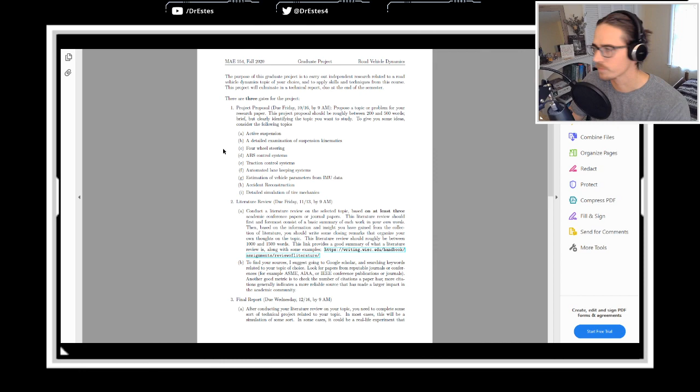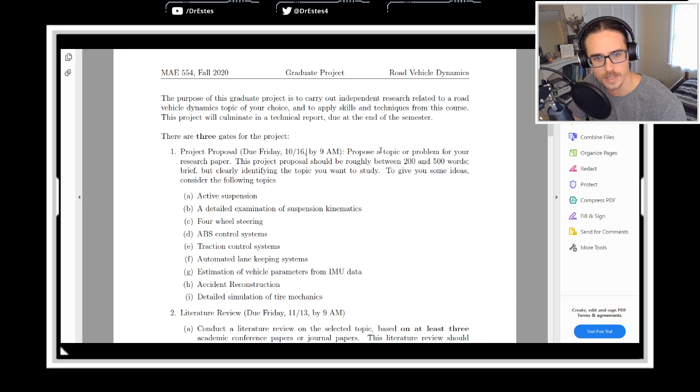For those of you who are graduate students, I did post a description of the graduate project, and this is what Chin was talking about. The first thing you need to do by Friday, October 16th, is give me a topic that you want to do. I listed a bunch of stuff here, but you don't have to pick one of these. This is just to give you an idea of the type of stuff that's out there that I think is interesting or that people have looked at before.

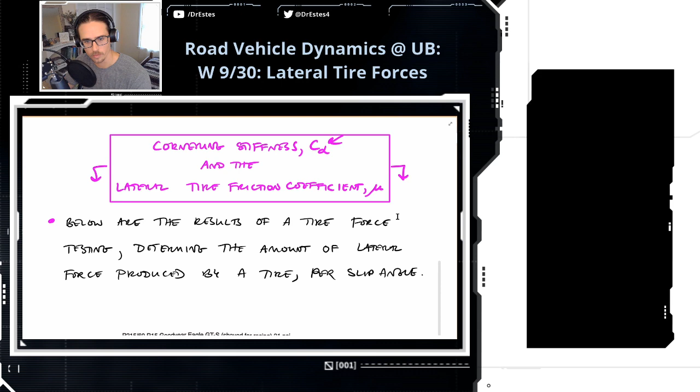Okay, let's find this thing. Alright, okay, I gotta fix this. We're looking at cornering stiffness, and okay, let's just leave it at there, because that's an important one. Okay.

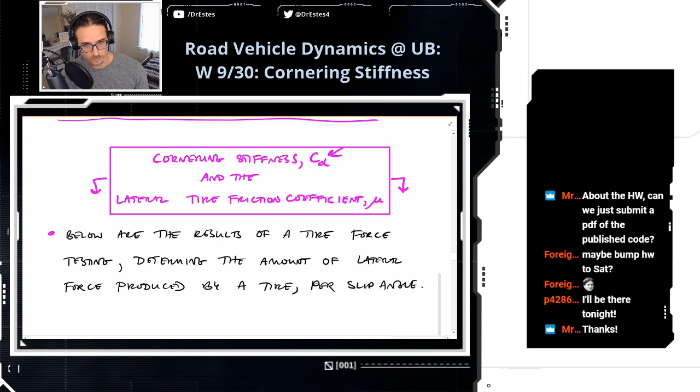Okay, ooh, finished, very nice. Yeah, once you get going, I think this homework is pretty reasonable. It's a cool result, you get to see how this car performs over the quarter mile. And it's decently close to the real performance of the car. If you look up quarter mile times for a ZR1, it's going to be pretty close to what you get. You have the power.

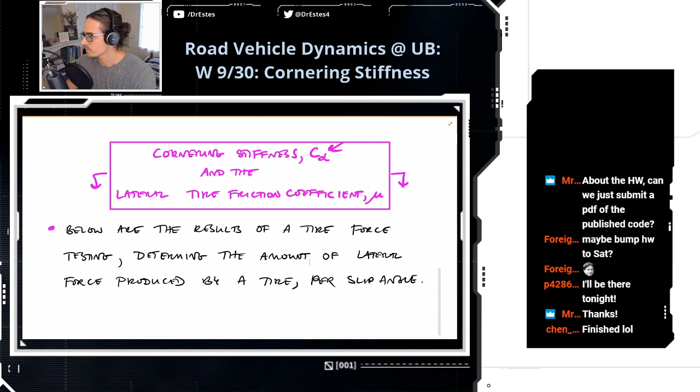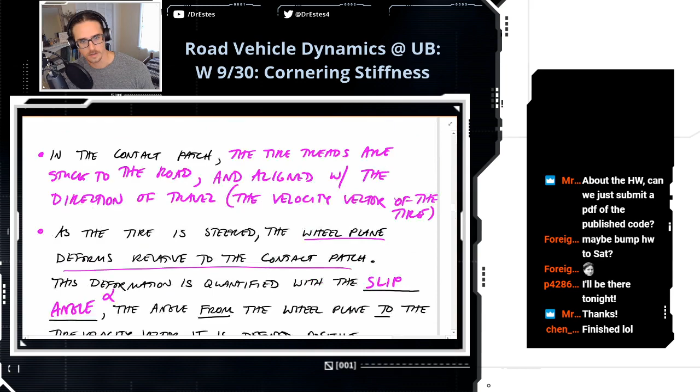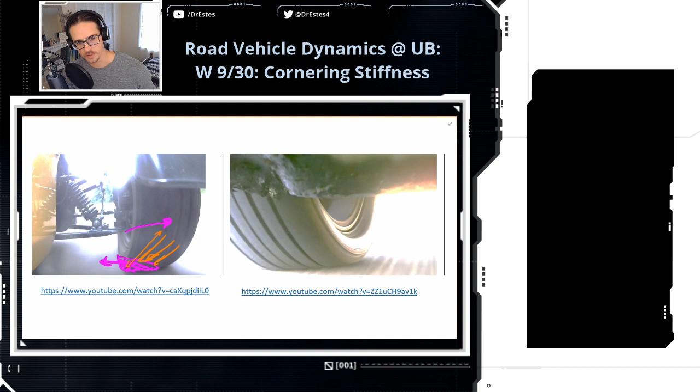But the contact patch is stuck to the ground, so the car is kind of pulling this way just because of its inertial force. And that stretches the tire relative to this contact patch. But the tire acts like a spring, and it's trying to pull the car back this way. And that's like the basic intuition about how tire forces are being generated. The tire's stuck to the road, and then it stretches and it pulls the whole car towards the contact patch.

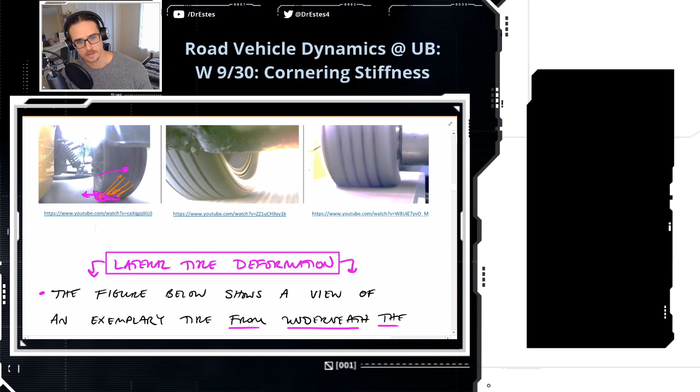We measure this lateral deformation in the tire using a slip angle, which is this angle in here. It's the angle between the wheel plane of the car, of the tire. So think of this tire plane as where the tire's pointing.

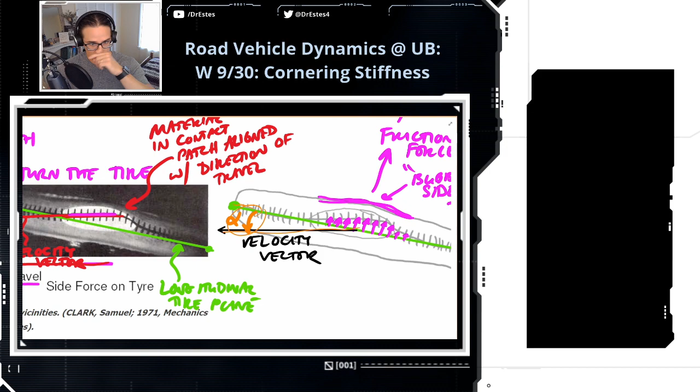But the direction that the tire is actually heading, the velocity vector, there's generally a difference when you're cornering. When you're going straight, the tire plane is lined up with the velocity vector, but most of the time it's interesting in Formula One races or any race when you've got crazy corners and whatever.

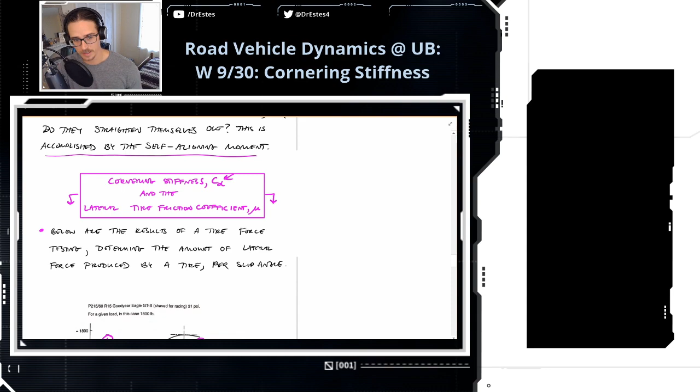So there's going to be a difference there. Today we're going to talk about cornering stiffness and the tire friction coefficient, and it's related to this slip angle. So let's get into it.

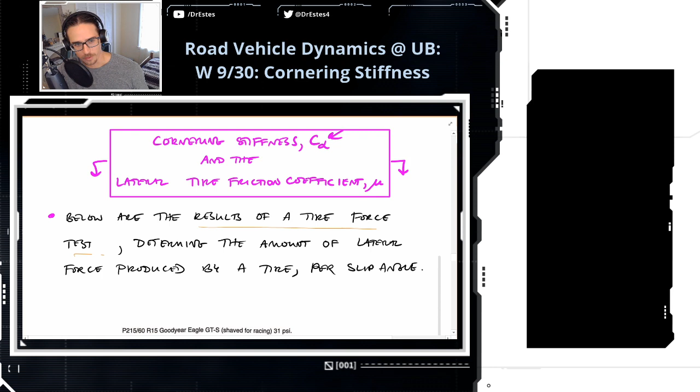Below are the results of a tire force test. This test determines the amount of lateral force produced by a tire per slip angle. So let's talk about what's happening here.

On the horizontal axis of this graph, we have the slip angle, alpha. You can see that the slip angle is increasing this way, going from 1 degree all the way up to 8 degrees. Going back to the picture from before, this is showing an increase in angle between the tire plane and the actual velocity vector of the tire.

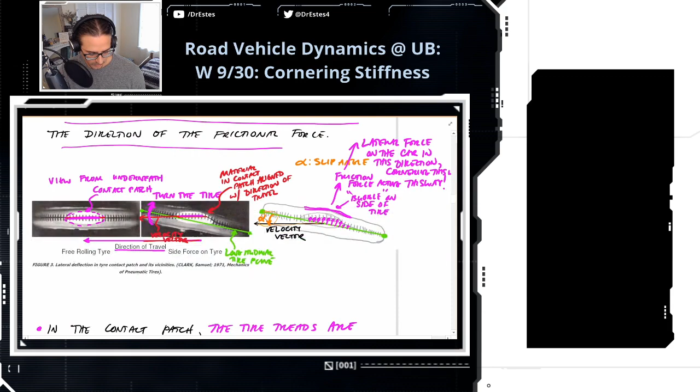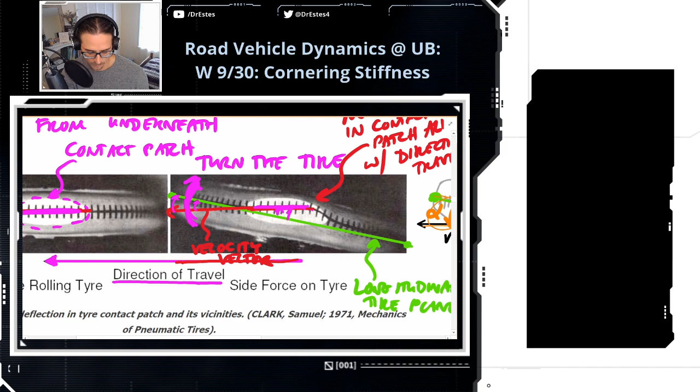Going back to a picture I like, it's kind of like this, where this angle in here, they're increasing it. Basically in the tire contact patch, the tire is getting stretched more and more and more. That's how you interpret the x-axis - the tire is getting stretched in the contact patch more and more, measured with the slip angle. Now, what happens to the lateral force?

We'll refer to lateral force as F sub y. Like longitudinal force, we had F sub x in the x direction, this is going to be in the y direction. This is going to be in pounds, pound force. Notice that these numbers are negative - that's just sign convention, we'll worry more about that later. But I want to point out there's 3 regions of behavior for lateral force that a tire makes.

The first one is the elastic or linear region. We call it the linear region because as the slip angle increases, the lateral force increases linearly. So we can get the slope of this - the slope would be the change in lateral force. The vertical axis is actually plotting negative lateral force, but I'm taking the derivative of that quantity with respect to the slip angle. So that's the slope there.

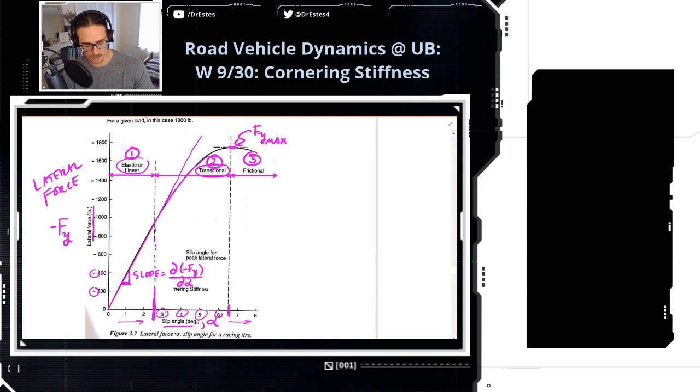Now, if you go beyond this slip angle, the tire starts to produce less lateral force. If this graph continued, it kind of goes down and levels out - it doesn't keep going down, it kind of levels out. What's happening this way is the tire's starting to slide.

But if you're racing and trying to get around a corner as fast as possible, you want to be in the region where you're producing the most lateral force, and that's going to allow you to go faster through a corner. You're playing a gambling game where you're trying to get the slip angle of the tire to around 6 degrees.

It's different for different tires, but if you go beyond that, you're going to start to lose traction. So racing, especially with corners, is balancing on a knife's edge. When you're drifting, at least some of your tires are over here - they're not producing maximum lateral force anymore. They're kind of sliding. So generally, drifting isn't the fastest way around a track because you're not generating the maximum lateral force.

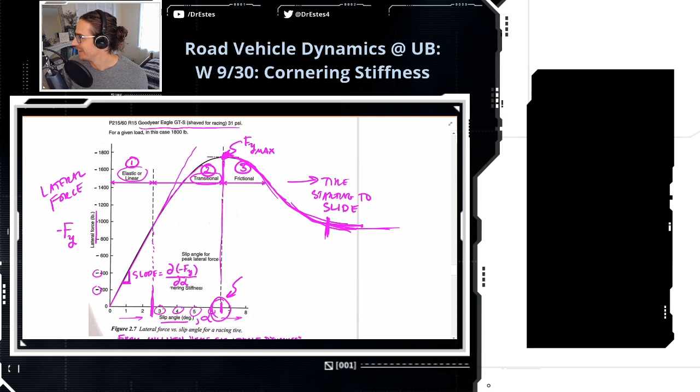I don't know if Gary would argue with me there, but okay.

According to SAE convention, the Society of Automotive Engineers, a positive slip angle creates negative lateral force. That's just the convention. So that's why in this graph I have positive slip angles here with negative lateral force. This will make more sense once we develop the dynamics - you'll see which directions things are pointing and what that means. But for now, just take it that a positive slip angle is going to be negative lateral force.

By the way, lateral force is defined positive to the right hand of the driver. So if you have a positive lateral force, according to SAE convention, that means you're cornering to the right because your tire needs to be producing a force to the right in order to corner to the right. So positive lateral force generally means a right turn, and your tires are going to have a negative slip angle in that case.

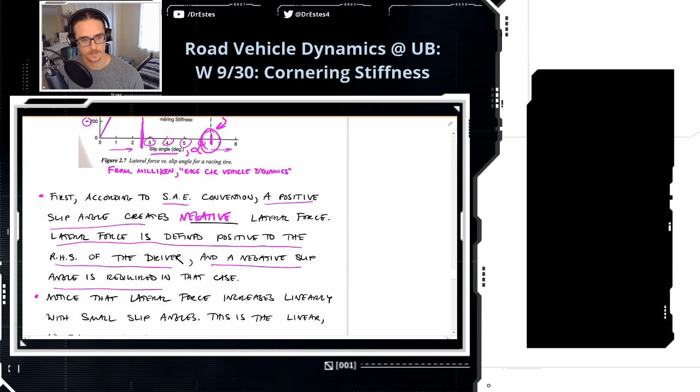From the graph, we notice that lateral force increases linearly when the slip angles are small. What if we meet a sharp corner and have to make the slip angle greater than 8 degrees? Well, hold on to your hat. Put on your seatbelt.

What you can do in a sharp corner is slow down as well. And that happens in Formula One. I forget which famous racetrack it is - Monaco or something, I hope I'm not getting that wrong. But there's this famous hairpin turn. It's super tight, and it's also down this steep grade. You're going down into the turn and then you have to turn really tight.

Yeah, Monaco. And they slow down to what, 20 or 30 miles per hour going through that turn. Because the faster you go through a turn, and the tighter that turn is, the more lateral force your tires have to produce to hold you into that corner. And you notice this when driving around yourself - if you make a turn and you go very fast through it, you really feel yourself thrown around.

So sometimes drifting is hard to... no, you don't have to drift. You could slow down. There's nothing wrong with slowing down into a corner.

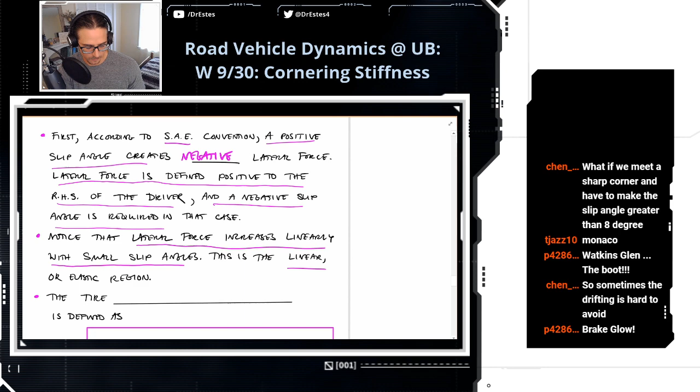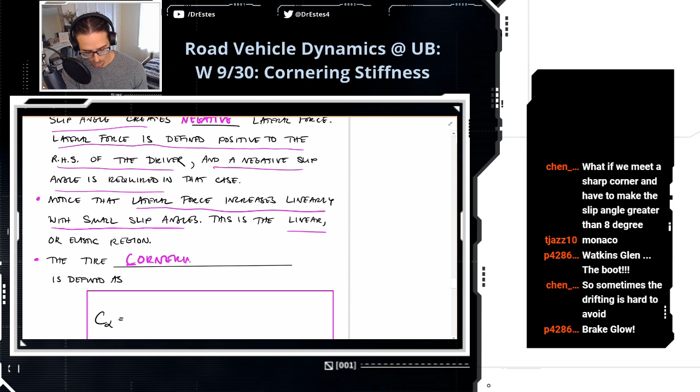Okay, so lateral force increases linearly when the slip angles are small - that's the linear region. And this brings us to the definition of tire cornering stiffness. So the tire cornering stiffness is defined as the slope - this slope in the linear region, we define this as the tire cornering stiffness. So if your tire has more cornering stiffness, it means you get more lateral force per slip angle.

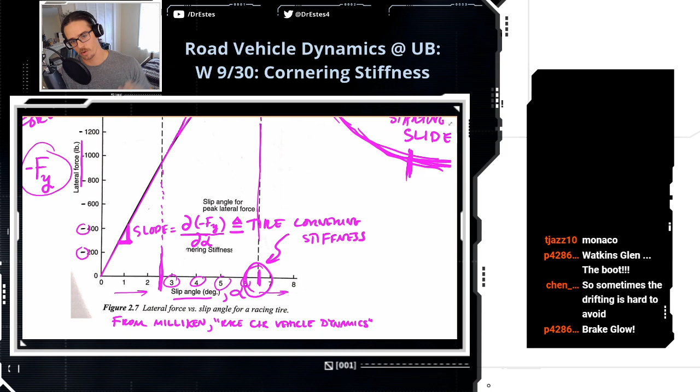So like we'll talk about Formula 1 tires - they have an absurd cornering stiffness. If you stretch the tire just the tiniest amount, creating a small slip angle, the cornering force it produces is just astronomically more than a passenger tire.

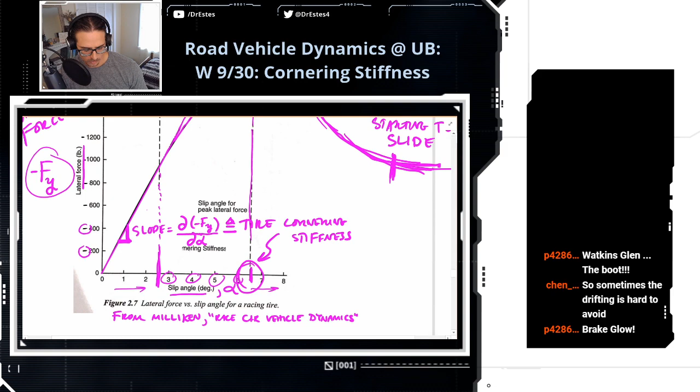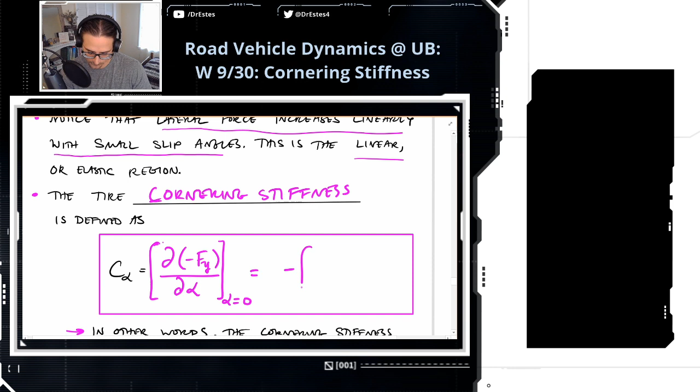All right, so cornering stiffness is defined as the slope in there. So what was that slope? It's the derivative of the negative of the lateral force with respect to the slip angle. And on top of that, we add this extra detail where we say you should be taking this slope close to where the slip angle is 0. So where do you calculate that slope? Well, you should be close to the origin when you get that slope, to make sure that you're in the linear region. So we could also write this as minus the derivative of the lateral force with respect to the slip angle, close to the origin there.

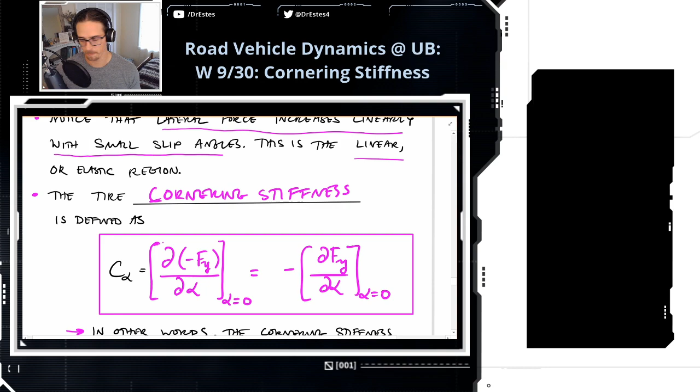So in other words, the cornering stiffness is the negative of the slope if you're plotting lateral force versus slip angle. In the figure above, it was the slope itself because I plotted negative Fy. So don't let that confuse you. We'll do an example in a second that shows this kind of orientation.

So we'll get to see both. And when you get the slope, you should be close to the origin. So the units of the cornering stiffness are...

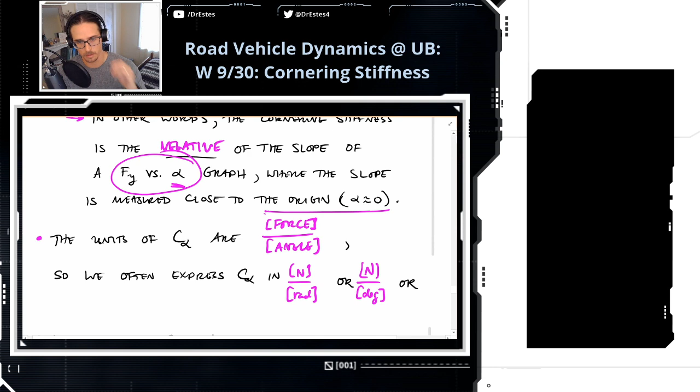So it's lateral force, so it's a force divided by an angle. So we often express cornering stiffness in newtons per radian of slip angle, or newtons per degree of slip, or pound force per degree. So you can see cornering stiffness expressed in all these different ways. You'll just have to be careful with the units here whenever you're doing calculations.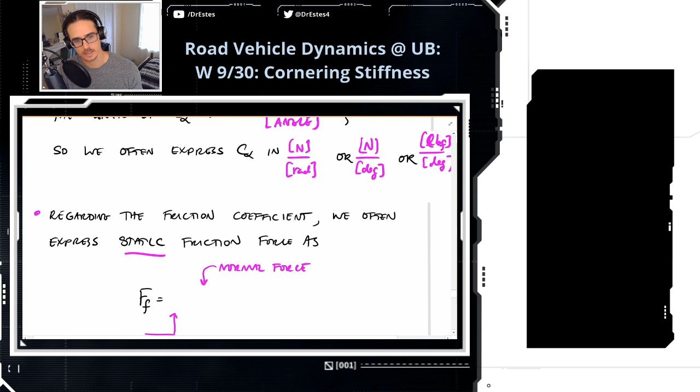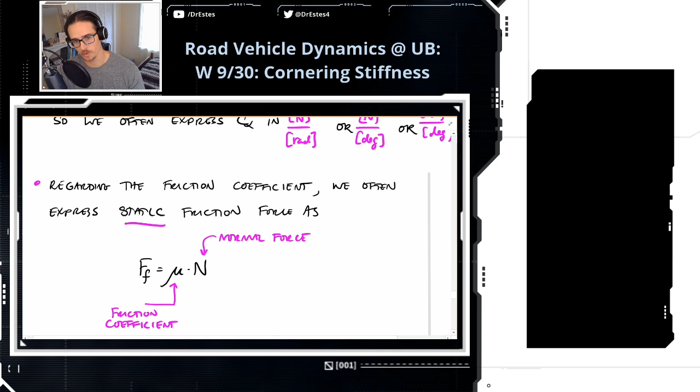So that's cornering stiffness. Let's talk about the friction coefficient of a tire. Let's talk about static friction, because this is what we're hoping for with tires, that the rubber is sticking to the road, and that's like a static friction force. So we often express static friction force like this - this will be familiar to all of you. You take the static friction coefficient and multiply it by the normal force. So that's just a common definition of the friction coefficient.

And we define the friction coefficient in such a way that we can predict the maximum static friction force before the relative surfaces start to slide, right? That's what the static friction coefficient tells you - how much force can I apply to some static object before it starts to slide? And that boundary is right here: the friction coefficient times the normal force on that object.

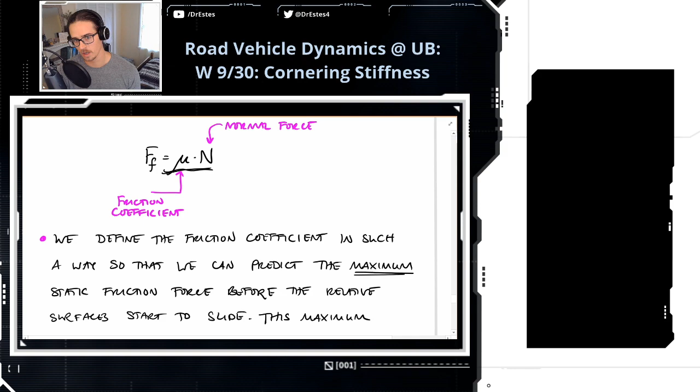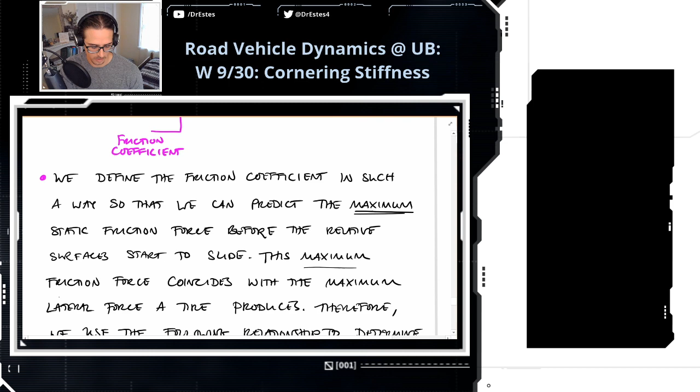So it's the same with tires. This maximum friction coefficient, or maximum friction force for a tire, coincides with the maximum lateral force a tire produces. Because think about this: if a tire starts to slide relative to the road and it's no longer sticking, then the tire isn't really being stressed as much anymore. And the stress on the tire is good because it's like a spring - you want to put a lot of stress on it so that it deforms and pulls the car. But if I lose that friction with the road, the tire just starts to slide. It's not able to pull the car anymore, and you just slide out of the corner.

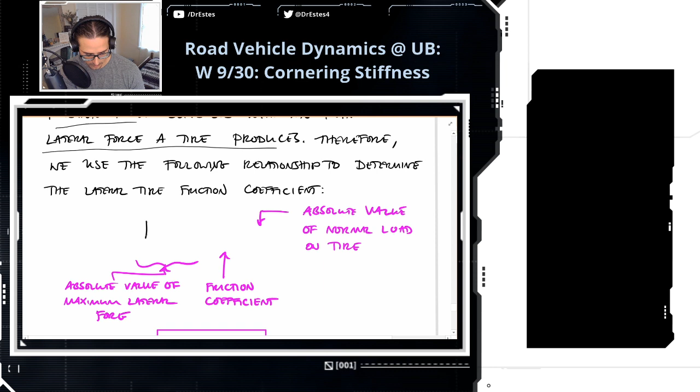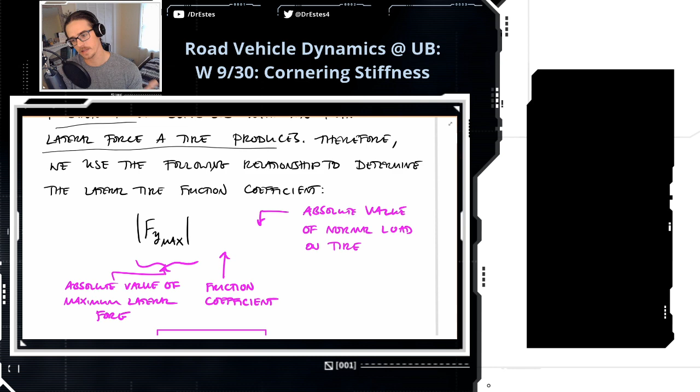So we use the following relationship to determine the lateral tire friction coefficient. What you do is take the absolute value of the maximum lateral force - lateral force is Fy. We get the maximum, and depending on which way you're cornering, this might be negative or positive lateral force, and that's why I take the absolute value. This is going to be equal to the friction coefficient times the absolute value of the normal load, which we call Fz. So Fz is the normal load on the tire.

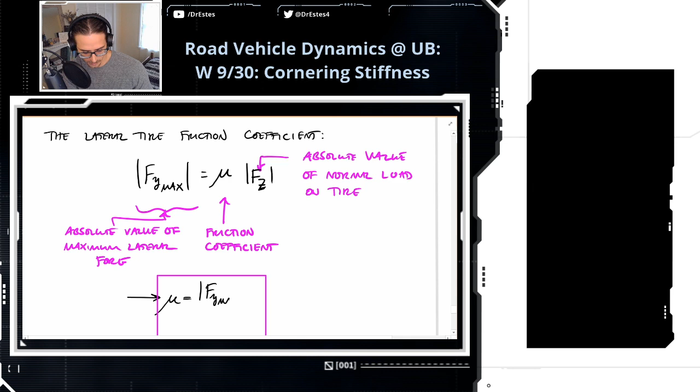So if we want to solve for the friction coefficient - I run a tire test and want to say, okay, what's the friction coefficient? I have to take whatever maximum lateral force I got from my tire test, divide that by the normal load that was on the tire at that time, and that's my friction coefficient.

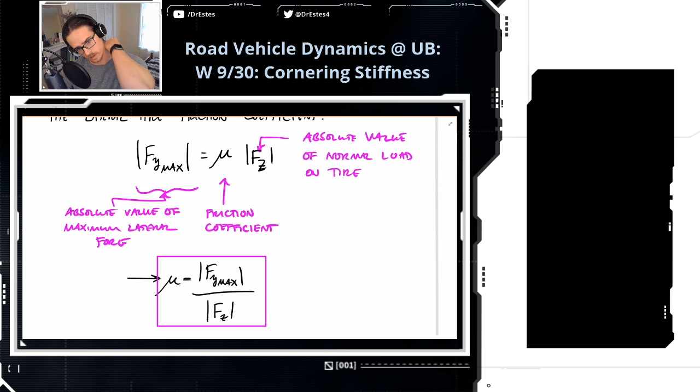So now we're going to do an example to calculate the friction coefficient for a real tire, and we'll do the cornering stiffness as well. This will make more sense once we do this example. So, example: how do you calculate the cornering stiffness and friction coefficient for a specific tire at a specific normal load? Okay, look at this graph.

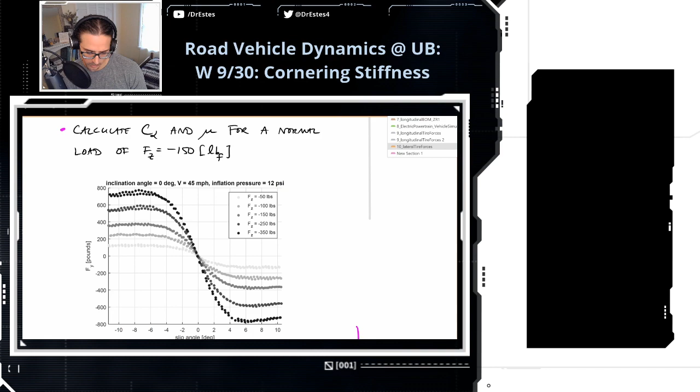This is data from a sequence of tire tests, and the tire here is a Formula SAE tire. What you should know about a tire like this - actually I think I have a picture of it, because we're going to go to this next set of notes in a second - it looks like a Formula tire, but it's smaller. Formula SAE, we used to have a team at UB, we don't anymore, it'd be cool to bring it back. But you ride a little car like this, it's kind of like a little go-kart. The wheelbase from front axle to rear axle is like 1.6 meters.

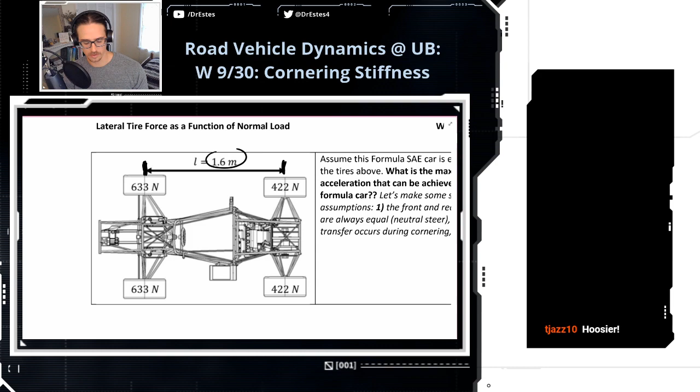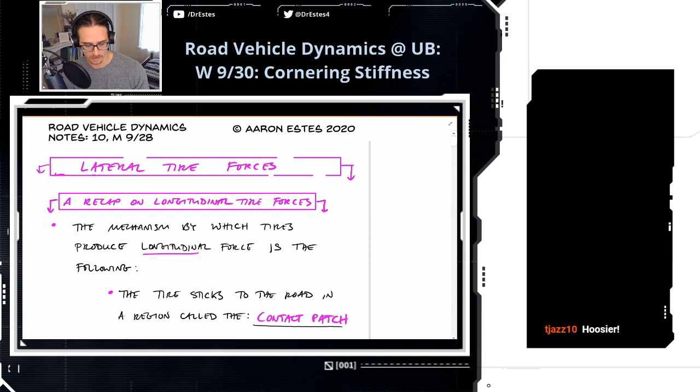So what is that in feet? I don't know, it's a couple feet. It's kind of like a go-kart, but you have this pretty nice tire on there, except it's small. So just visualize that when we're talking about this - oh, it went all the way to the top - but that's the tire that we're testing here. Okay, so let's look at this axis.

This is lateral force, and this is slip angle. Notice this graph is a little different because I have negative slip angles and positive slip angles, and that's why this graph has this kind of symmetry.

When I turn the tire one direction, that creates positive slip angles. SAE convention says a positive slip angle creates a negative lateral force, so all of these are negative. When I turn the tire the other way, I get negative slip angles, which produces positive lateral force.

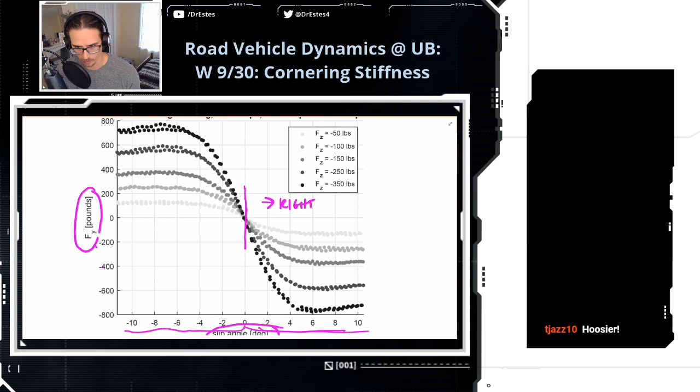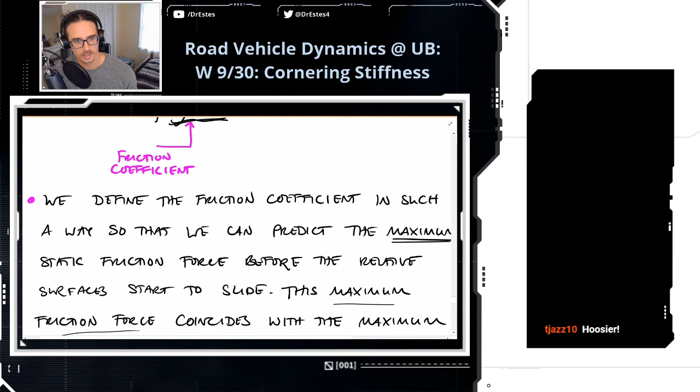So you have this middle line. This should be a... wait, what did I say? Negative lateral force is a right turn? I have to check. All right, let's check this. The cornering stiffness, no, that's not what I want to see.

Negative lateral force is defined... wait, a positive slip angle creates negative lateral force. If the lateral force is positive, it's to the right-hand side of the driver. So positive lateral force is a right-hand turn.

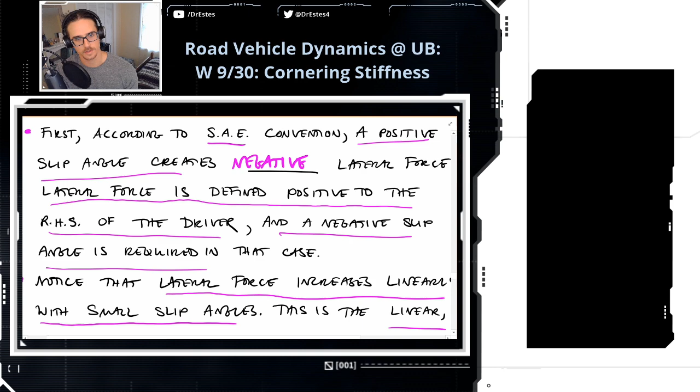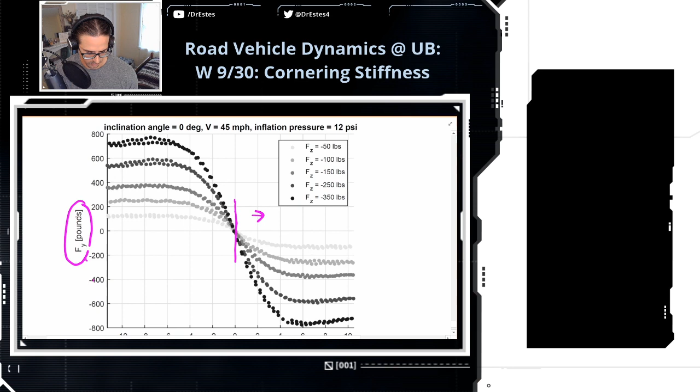So when you're looking at this data here, that's positive lateral force, so this is like turning the tire to the right. And this is like turning the tire to the left. As I turn it more and more, it creates more and more force in that direction.

Now, why are there 5 different lines? These are 5 different normal loads on the tire. Look at this: the really dark line is 350 pounds pressed onto the tire. So notice that the more load you put on a tire, the more lateral force it produces, basically to a point.

I think that makes sense. If you imagine really digging a tire into the ground and making sure the fibers are interlocked with the road surface, then deforming it relative to the road surface produces even more force. So when we do tire tests, we run through a bunch of different loads, and it's important because when you race, depending on which way you corner, the weight shifts in the car. It's always shifting to the outside tire.

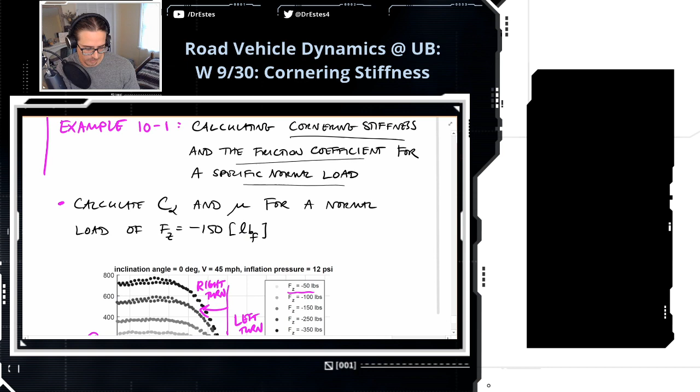All right, so this is what we want to do: I want to calculate the cornering stiffness and the friction coefficient when the normal load is minus 150 pounds. So we're looking at this one, the line that's right in the middle. Okay, let's do the cornering stiffness first.

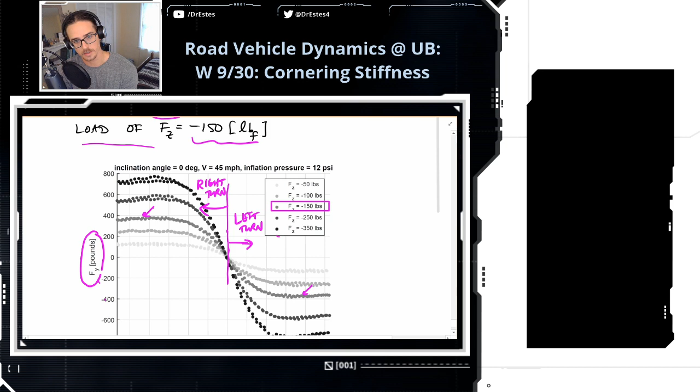Remember the definition of cornering stiffness: it's the negative of lateral force versus slip angle, taking that slope close to the origin. So what I need to do is get in here close to the origin and try to get a line. That looks pretty good.

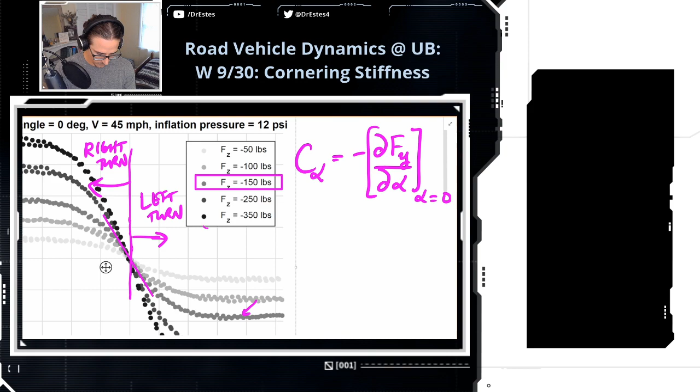If I get the slope in here, I'm just doing this by eye. When we do homework related to this, you're going to precisely calculate this slope in MATLAB using a linear regression that minimizes the squared sum of errors. But we're just doing a basic calculation here.

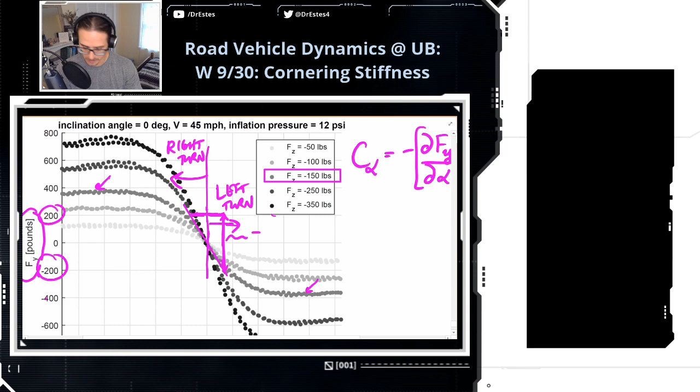You can see that in terms of vertical change here, if I look over at the right, I've changed minus 400 pounds. That's the vertical change over a horizontal distance of... well, the distance from here to here is 4 degrees, but we'll say it's a little bit less, so it's minus 400 pounds over 3 degrees of change in slip angle. So that's the slope.

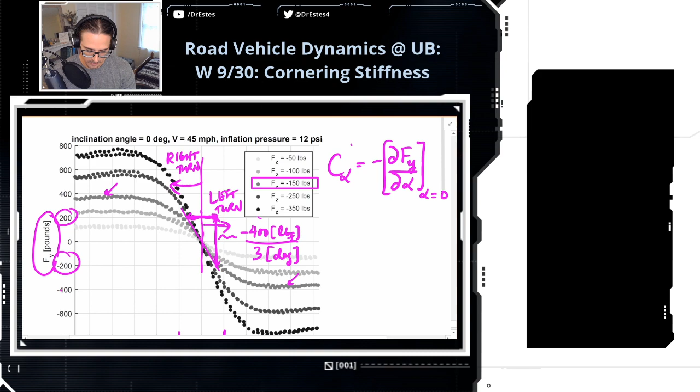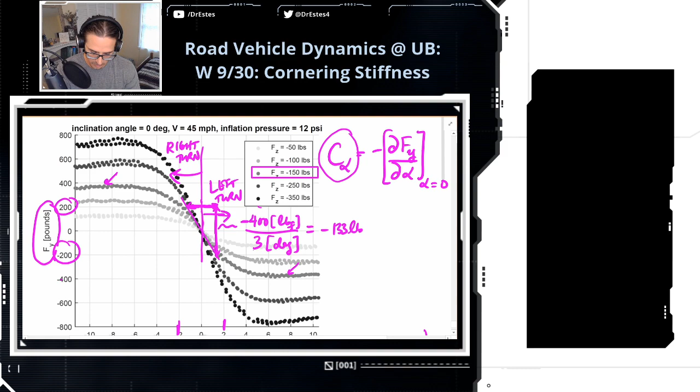But cornering stiffness is the negative of the slope, defined that way so it becomes a positive number, because for SAE sign convention, anytime you do a tire test there's going to be a negative slope here. So this is like negative 133 pound force per degree, and I'm just dividing that out. So the cornering stiffness, being the negative of the slope, is positive 133 pound force per degree.

When you ask somebody what's the cornering stiffness for a tire, that cornering stiffness is specific to a given normal load. Notice, if I took the slope for 350 pounds instead, it's going to be a larger slope, something like this. So cornering stiffness increases with normal load on a tire—the more load you press on a tire, the more lateral force it generates per slip angle.

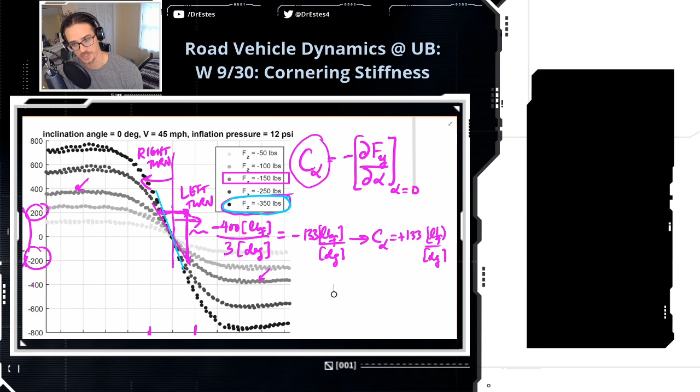Maybe I'll just write that right here. Cornering stiffness increases with normal load.

That's an important trend. All right, next, let's find the friction coefficient. So I wanted to get the friction coefficient mu for a normal load of minus 150 pounds. So our definition of mu, the friction coefficient, let's write it right here. Mu is the maximum lateral force, or the absolute value of it, divided by the absolute value of the normal load.

Often I'll have students forget what goes on top in this fraction. Is it the normal load or the lateral force? I can't remember. Well, if you ever get stuck there, go back to this equation. Like, what's the definition of friction force? The definition of friction force is mu times the normal load. So whenever you're solving for mu, it's the friction force divided by normal load. So normal load is in the denominator. So that's a way I would reason through it myself.

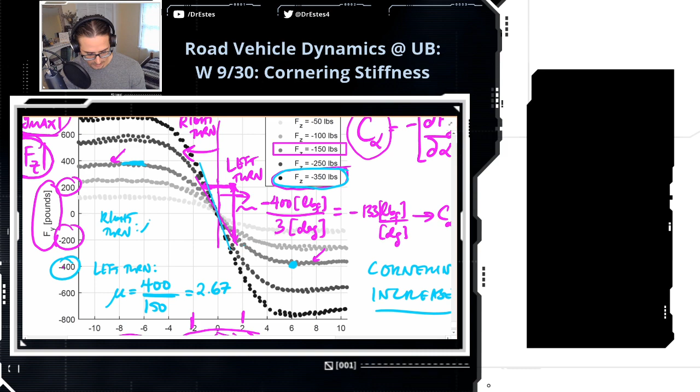What about a right turn? So I can also get the maximum lateral force on the right-hand side. And it makes sense that for a right-hand turn, the maximum lateral force is also pretty close to 400. So, right turn, let's say mu is 2.67. Eagle F1 had the highest, not sure if it still holds. Okay, gotcha.

Now, why would a tire ever not be symmetrical for slip angle? Well, sometimes, we'll see if we talk about this, but you can camber a tire. What does camber mean? Like, have you ever seen a car, like if you're looking at it from the back or something? So like this is the back of a car, and we got brake lights and stuff. But sometimes you've seen cars with their tires kind of tilted like this, right? Like they're not straight up and down, they're kind of tilted.

So that's called camber. And in that case, depending on your slip angle, it's not going to be the same. If I turn this tire right or left, it's going to generate a different amount of frictional force per slip angle. And if I did a tire test with it cambered on one side, it's going to look different than the other.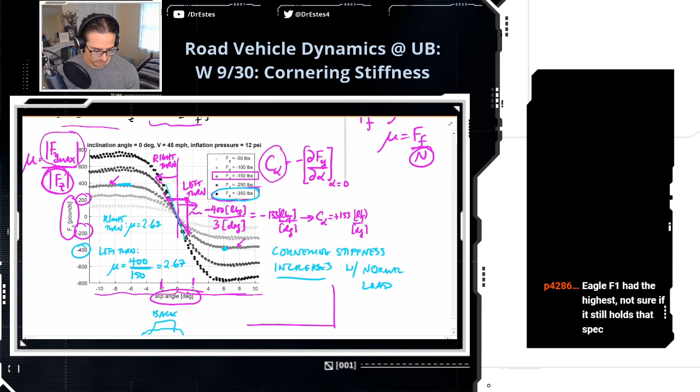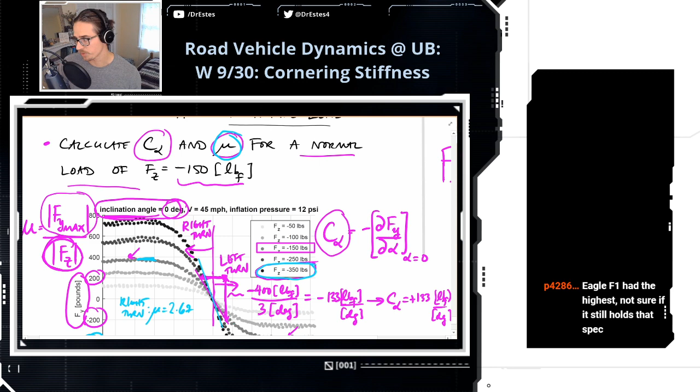But here, another name for camber, it's related to the inclination angle. I think they're the same thing, but maybe one angle is defined as negative and the other is positive. But anyways, inclination is like camber. So this car has an inclination angle of 0 degrees. So the tire's just straight up and down, and that's why it's symmetrical on either side. Okay, so this is an example of how you get cornering stiffness and a friction coefficient from a set of tire data.

Now, I want to move on to another example. It's on a different set of notes, which I posted last night. Sorry, I posted it really late. I didn't even put an announcement up because it was so late. But I want to go through a little example here and talk about some of these trends here. So this is another set of tire data. I think this is from the same tire. I think this is the same set of data.

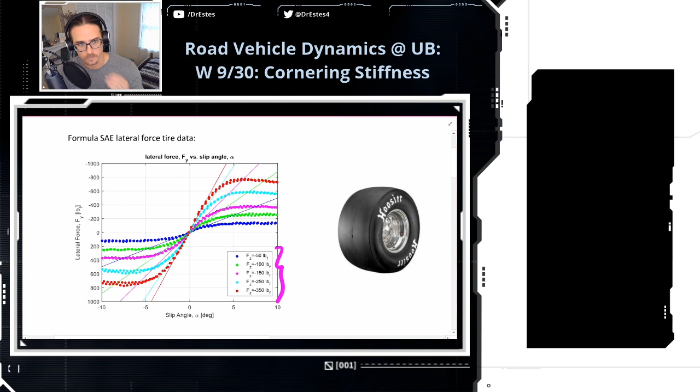Something different here - I flipped the axes. If you remember the shape of the other graph, it went the other direction. Well, that's all I did here, I flipped this axis up and down. So this axis is minus Fy instead of positive Fy.

What I want to do here is point out a couple trends. You can see I fit these lines with slopes. The red one is the highest normal load, 350 pounds, here's my linear fit. So the slope of this is the cornering stiffness for this tire at 350 pounds of normal force. What you can see is, like I told you on the other page, cornering stiffness increases with normal load. This is the highest load we tested, and it has the steepest slope.

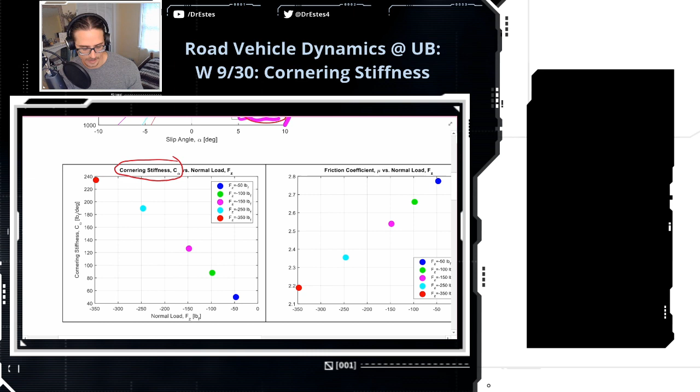If you were to compile the slopes for each of these lines, for each of those loads, that's what this graph is - cornering stiffness for this tire as a function of normal load. The horizontal axis is normal load, my biggest normal load is minus 350 pounds. This axis is cornering stiffness, so this one has the highest cornering stiffness, in pound force per degree. The slope is 240 pound force per degree at a normal load of 350. As the normal load decreases, the cornering stiffness goes down, down, down, down. It's kind of like a linear function. Like if you wanted to fit this, you can fit this with a line, and this would allow you to predict the cornering stiffness at a given normal load.

So what they do for tires when you're trying to simulate a car - take a step back. When you run a tire test, it's only reasonable to run a certain number of experiments because they're expensive, you've got to run all the machinery. So here we have 5 different tests. With 5 tests, I have enough data to find a trend. And if I want to find the cornering stiffness for a normal load of 200 pounds, I don't have to run a whole new test. I could say, look, I fit this function, I could come back in here and have a pretty good guess that at 200 pounds, I'm going to get a cornering stiffness of like 160 pounds per degree.

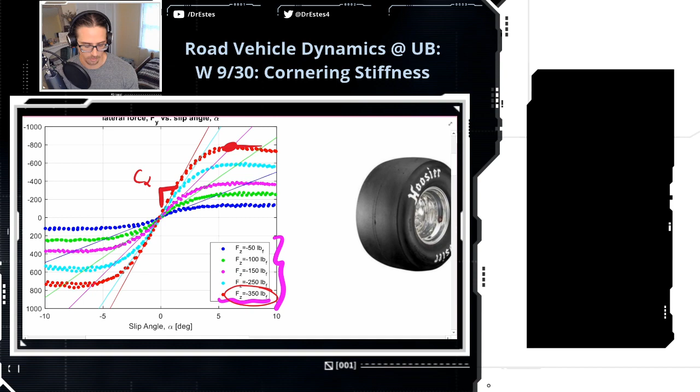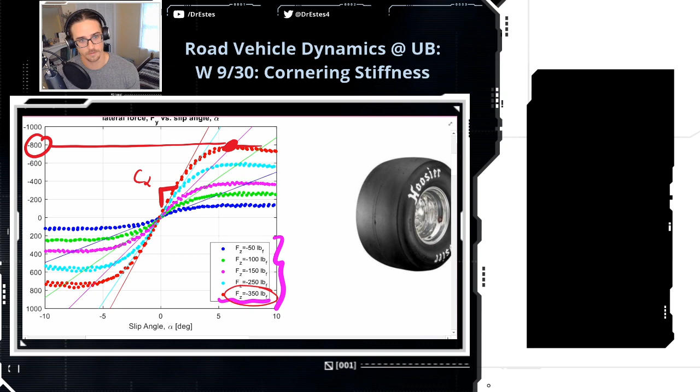Now the friction coefficient is different. It's kind of interesting, it's counterintuitive. Remember, the way to calculate the friction coefficient: you find the maximum lateral force and divide it by the normal load. So if I want the friction coefficient for 350 pounds, this is close to 800 pounds maximum lateral force, I divide that by 350, and that gives me my friction coefficient. So this plot shows friction coefficient versus normal load. On this axis is the normal load, on this axis is mu, my friction coefficient. The axes are a little weird here because here's my biggest normal load on this side, and my normal load is going towards 0 on this side. So look at this - my friction coefficient is like 2.2 for 350 pounds of normal load.

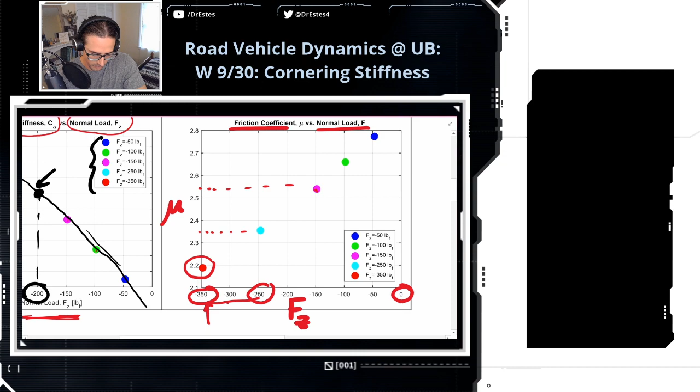And if I decrease the normal load, the friction coefficient actually goes up. So I reduced the normal load by 100 pounds, my friction coefficient went up to like 2.35. If I reduce it by another 100 pounds, my friction coefficient went up to like 2.55. And this relationship is pretty linear - check this out, you can fit this pretty nicely. I'm just doing that by eye.

But let's take a second to write this, this is important. Friction coefficient decreases, and further it decreases linearly with normal load. That's what this trend is showing here.

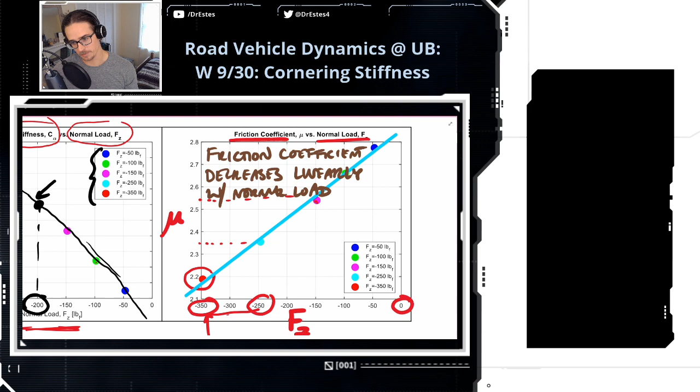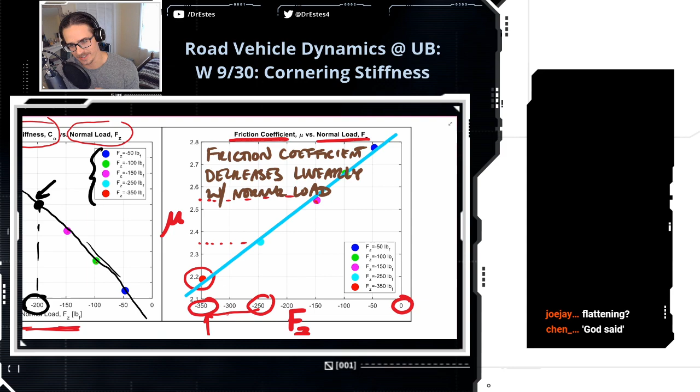Now, I told you about Douglas Milliken - he's like a guru in vehicle dynamics, and he came to UB last fall. All of us in the class were stumped, we were like, this doesn't make sense - why would the friction coefficient go down the more load that I put on a tire? Doesn't it make sense that it would grip better? So we asked Douglas Milliken about it, and his explanation was, well, tires are made of rubber, and rubber is a complex compound, and it behaves in really strange ways. And that was his answer - this tire flattening, God said. As far as vehicle dynamics goes, if Doug Milliken says it, he's pretty much right.

This phenomenon has a name. We call this tire load sensitivity.

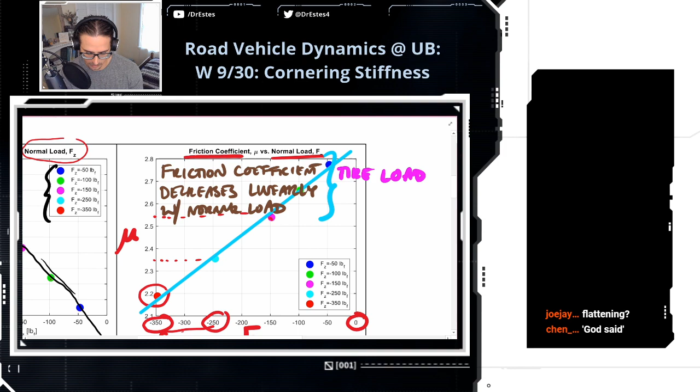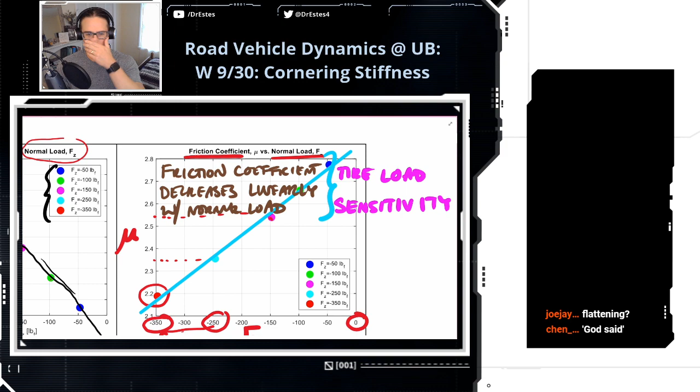So when we say tire load sensitivity, we're referring to this behavior where the friction coefficient for a tire goes down the more load you put on that tire. But don't get confused here, because this is confusing. If you look at this graph, the amount of lateral force you can produce definitely increases with normal load. So I'm not saying that the more load you put on a tire, the less force it produces, because that's not what we see here.

350 pounds on this tire, that's the highest load we tested. That produced the most lateral force at a slip angle of like 6 degrees or something. But by the definition of the friction coefficient, this ratio is going down the more load you put on a tire. It's an interesting thing.

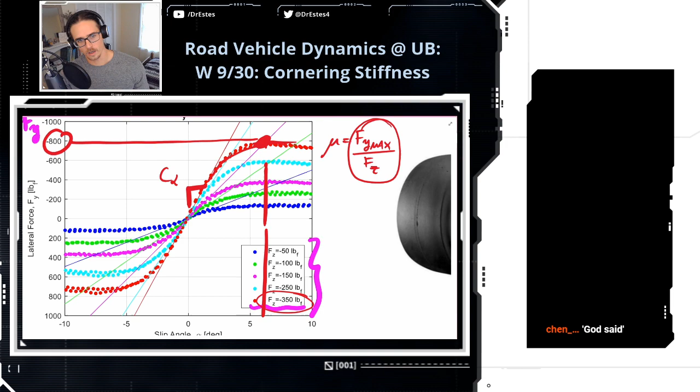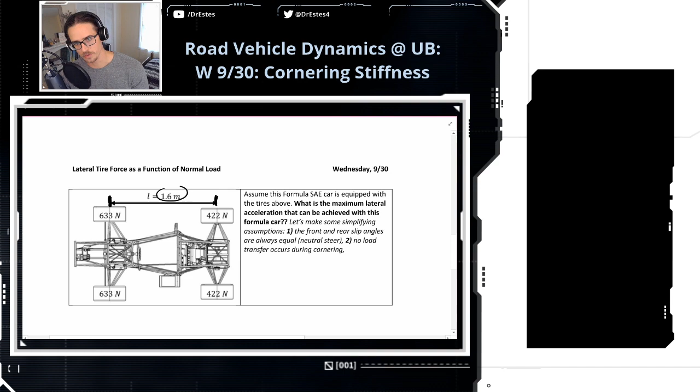Okay, we ran out of time, but maybe we'll get to this beginning of next week or something - how can you use this tire data? What does it actually enable you to say about a car? This is the question I wanted to answer. If I take that Formula SAE car and put those tires we've analyzed, if I slap 4 of those tires on this car, what's the maximum lateral acceleration I can get? It allows you to answer questions like that. So you can predict, okay, this tire can produce this much force, and what impact does that make for me on the track? That's the kind of question you answer.

So we'll get back to this next time. But that's it for today, guys. That's friction coefficient, that's cornering stiffness. We're going to be dealing with these quantities for the rest of the class because they're an integral part of any vehicle model and predicting your performance.

And with that, I'm going to take a sip of orange juice.

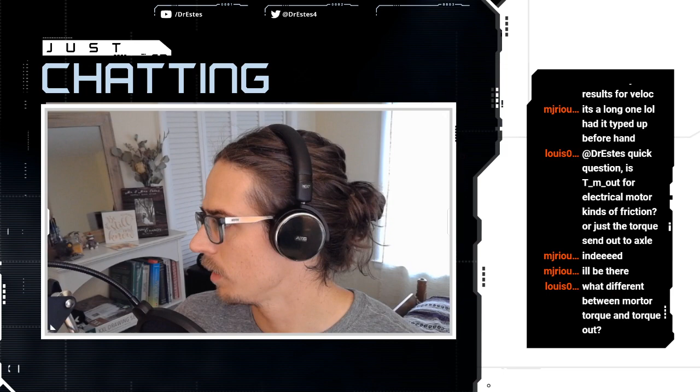What's the difference between motor torque and the torque out? Kind of confused. Okay, Louis, the motor torque, the torque out is the reactionary torque on the motor shaft. It's kind of like what we did with the engine, an internal combustion engine. You have combustion happening in your engine, and that rotates the crankshaft, right? And that's what we call the torque in the engine. But some of that torque goes into actually overcoming the inertia of the engine itself, spinning up the crank and all of that. And then the actual output at the engine shaft is what's left over after spinning up the inertia of the engine.

So it's the same with an electric motor. You have some initial torque, but that torque goes into accelerating the rotor of the motor, and that steals some of the torque. But it's like the reactionary torque at the end of the shaft, so it's what actually goes to the rest of the car. It is weird to think about.